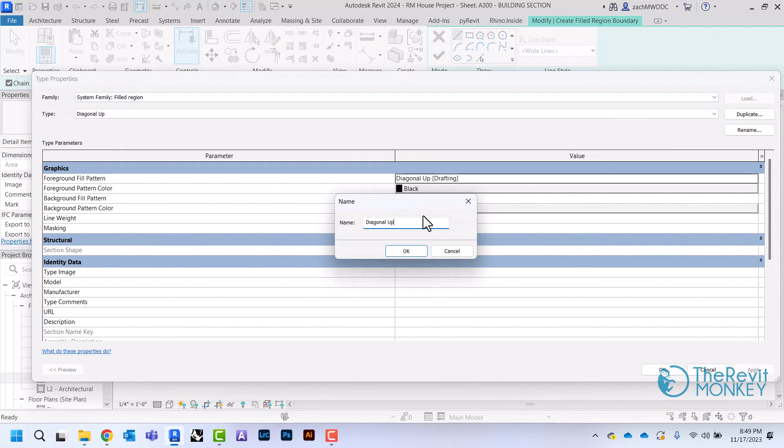The next thing I'm going to do is add some filled regions to help clean this up. I'll come up to my Annotate tab, go to filled region, and create one with the earth hatch pattern. We don't currently have one, so I'll just pick one at random, hit Edit Type, duplicate it, and call this earth. Then I'll change the drafting pattern to the earth drafting pattern.

The other thing I want to check is to make sure we have what's called masking, which just means it's not transparent. If I wanted it to be transparent, I would uncheck that, but I'm just going to leave that checked for now and click OK.

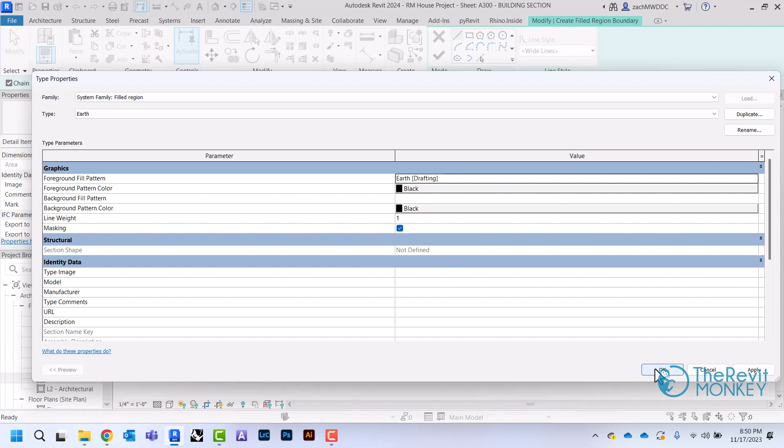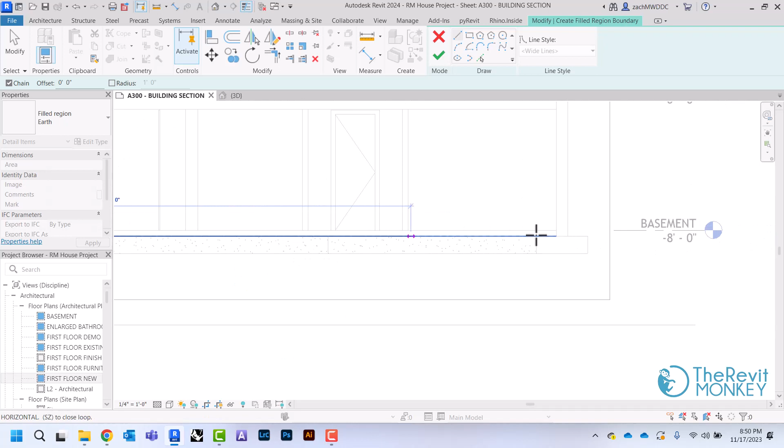Then I want to check my lines. I want a wide line to match where I'm cutting, so I'm just going to draw this around my foundation, down the wall and around my footing, then up to the bottom of my floor. I'm not going to show my footing that's beyond - I just want to see what I'm cutting through. So I'm just going to go around.

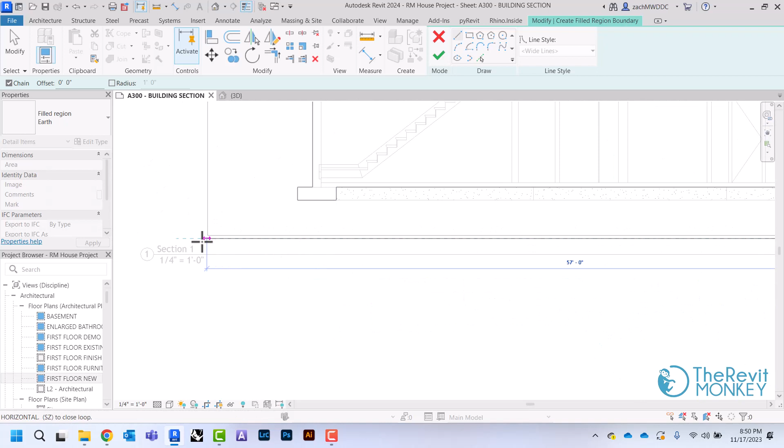When I get up to level 1, I'm going to show this coming down at 5 degrees just to show it sloping away from the building. I'll draw just outside of my crop region so that when I turn that off, the filled region bleeds past the crop region and I don't see it. Then I'm just going to clean that up.

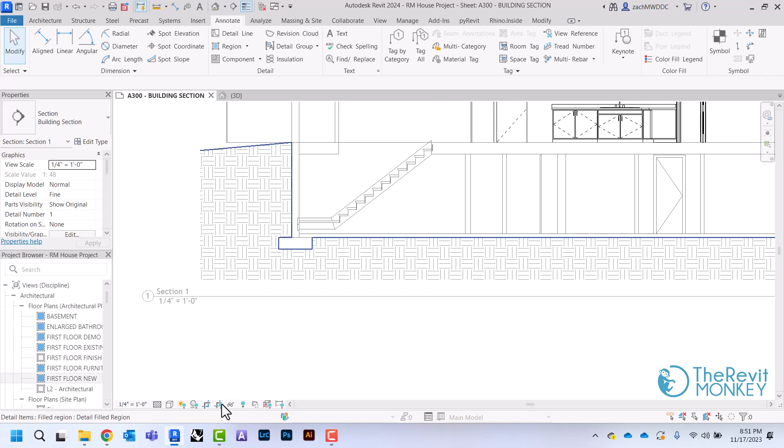Now you'll see I've got a nice pattern going around my house. When I turn my crop region off, you'll see I get that illusion of an invisible line right there around where I've drawn that.

The next thing I'm going to do is add another filled region just to cover up the attic. I'm going to use the solid white for this one. If you don't already have it set up, you might need to set it up real quick, just like we did with the earth.

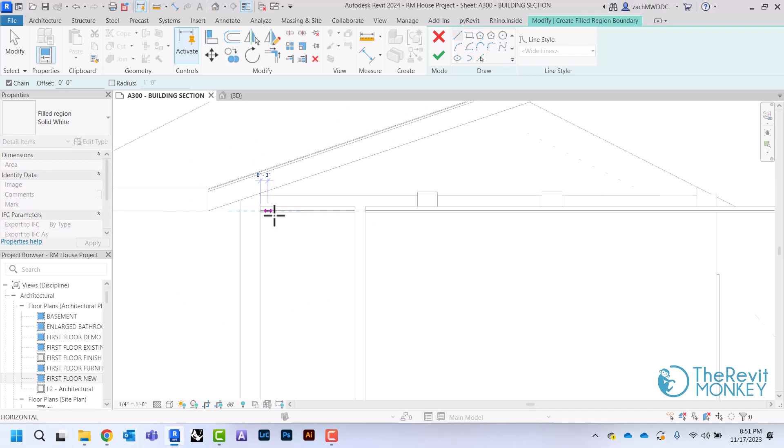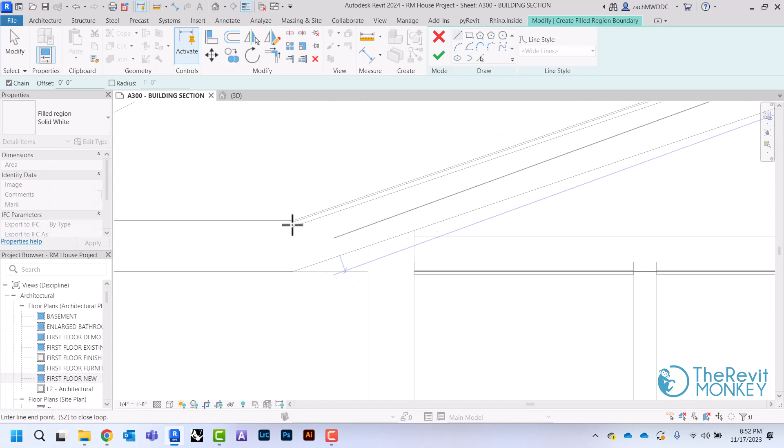I'm going to go across the ceiling like this - this represents where the bottom of the truss would be. I'll go straight across, then come through the underside of where my truss would be, and make sure this gets closed. That's going to clean up my cut through my attic quite nicely.

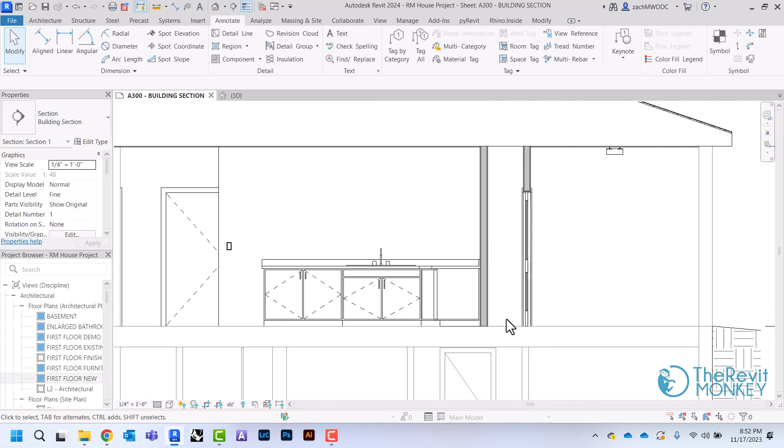The last thing I need to do is add some detail components. I have some framed walls here, so I'm going to come to the Insert tab and load an Autodesk family. The detail components are all under this Detail Items category, and I'll scroll down until I find Wood, which is Division 6.

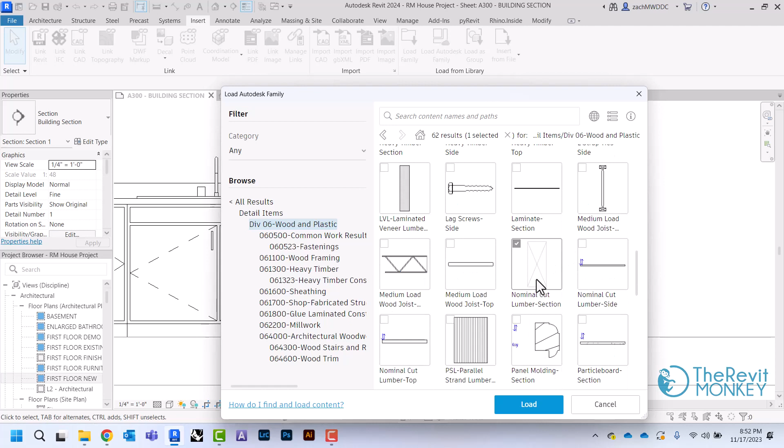I'll look until I find my nominal cut lumber section, hit load, and this brings up what's called a type catalog. There are a lot of different dimensions that this nominal cut lumber can have, so I'm just going to pick the ones I know I'll need: 2x4, 2x6, possibly a 2x12. I'll hit OK.

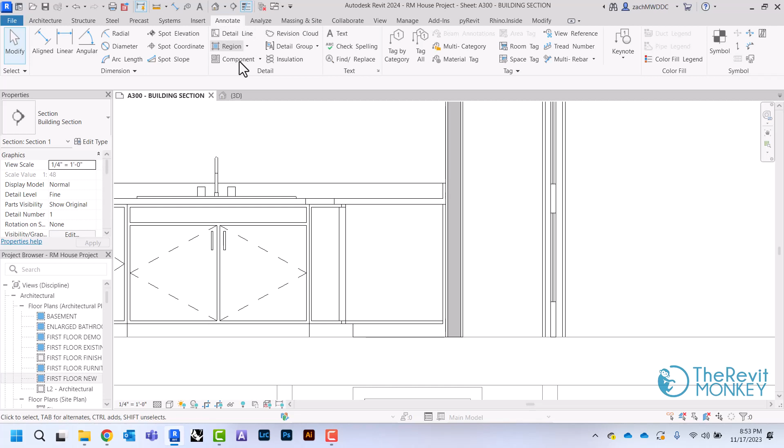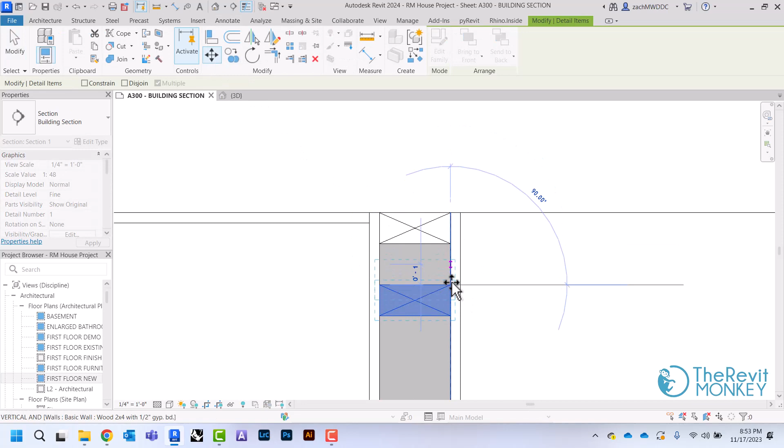Then I'm going to come to Annotate and add a detail component. I've got my 2x4, and I'll hit my space bar to rotate that. We're going to have one base plate, and then there'll be a double top plate, so I'll draw two of these and move them up to the top. That's how I add some detail components.

And this wall is also going to have a double top plate. Just getting these in the right spot.

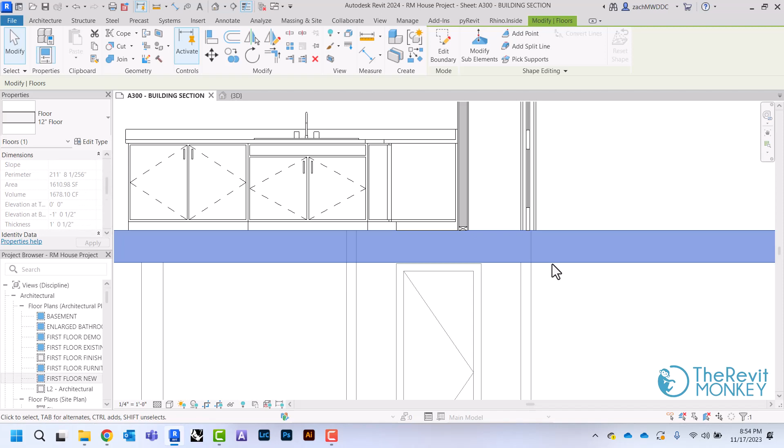I'm also going to draw it here on the floor, and just for the sake of visibility, I'll switch this to new construction so I can see my floor pattern. I'll do a detail component and do a 2x12, adding these in here.

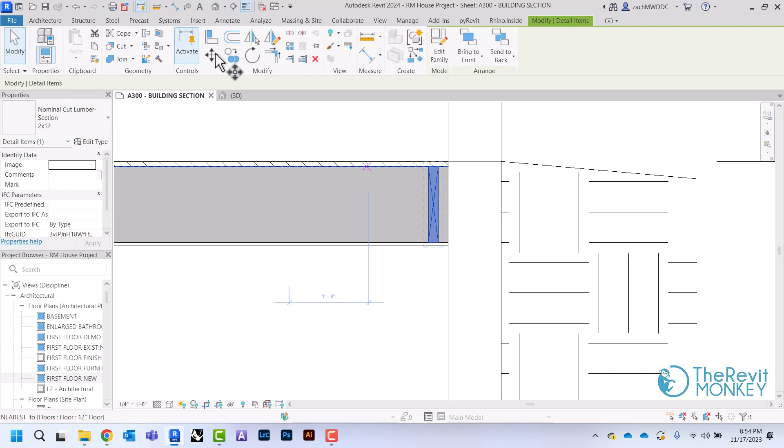Normally this would actually extend and sit on top of the foundation wall, but just for the sake of this example, I'm going to put this joist right up against the edge of the foundation wall.

The next thing I'm going to do is use my array tool, and I'll just copy this till it's 16 inches, because these are going to be placed 16 inches on center. Then I'll put a number in here to just repeat this.

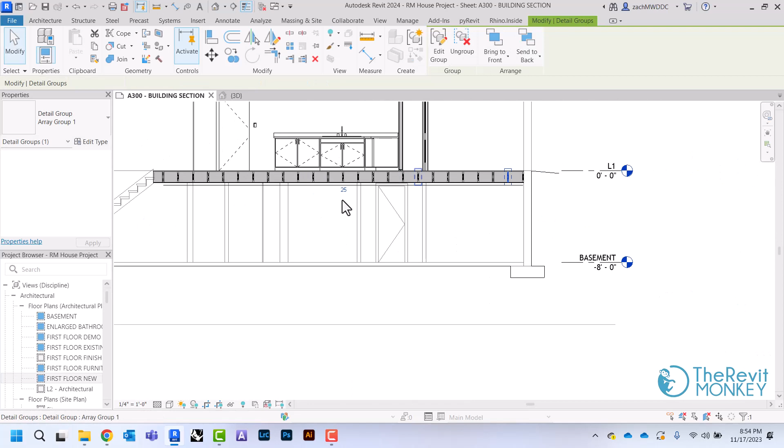So I've got all of those, and then I'm going to add another one right here at the edge of my stairs where that last riser is. Now I've cleaned this building section up to be an actual presentable building section.